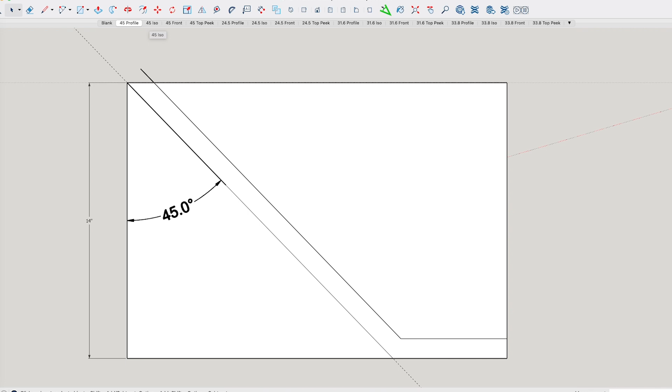All right, let's start with a frustum whose side angle is basically the same as that 45/45 crown molding spring angle, i.e. the blade tilt on this compound miter would be 30 degrees. Now notice at 28 by 28 and 14 inches tall, that's what this is modeled for here. At least in my opinion, this neither looks good nor is functional. It looks way too top heavy and like it would tip over. Not so good for a fire bowl.

So obviously we need something with a much steeper side angle that again still dictates a whole number blade tilt. How do we find that? Well, the good news is there are a number of more comprehensive compound angle calculators, and I've found a couple that are designed specifically with woodworking in mind.

This is perfect. Now, these calculators allow you to enter different values for different situations and compute all kinds of handy information. I've landed on this one at jansson.us, and all I can say is, man, I hope they never take this site down. This thing is awesome. Now, there's a number of different calculators on this site, and the one that I use most frequently that is a real bullseye for this type of object is this calculator for n-sided boxes.

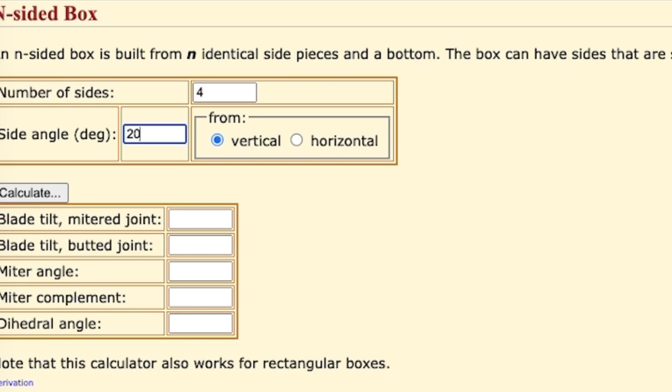Simply enter the number of sides for your object and a corresponding angle analogous to the spring angle in crown molding, click calculate, and bam, it'll spit out all the relevant associated angles for both the blade tilt and the miter angle, exactly what we need. So through a series of trial and error, we can explore a variety of side angles. For each of those, we can then note that side angle, model a frustum in SketchUp with that angle, and take a look and see whether or not it's aesthetically pleasing.

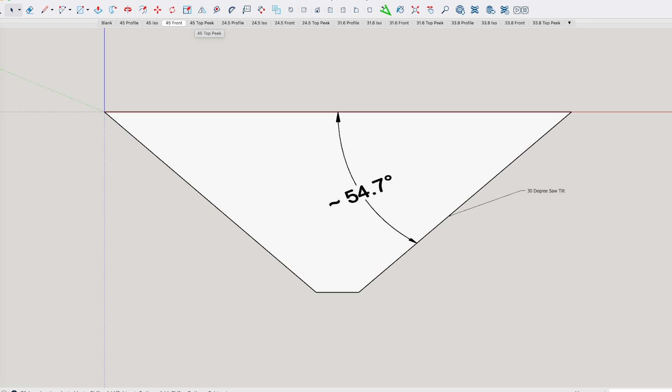If so, note those various corresponding angles, feed that into our fabrication downstream. This is exactly how I went about this. So let's take a look at a few of those. Okay, the first one was in fact the 45-degree side angle. And as I mentioned before, this one's automatically a no-go, but it's useful for a visual reference. I knew right away I needed something with a much steeper side angle, so I just kept cycling through and jumping around. And then the next one I landed on was this one, kind of the opposite extreme where it has a very steep side angle at 24.5 degrees.

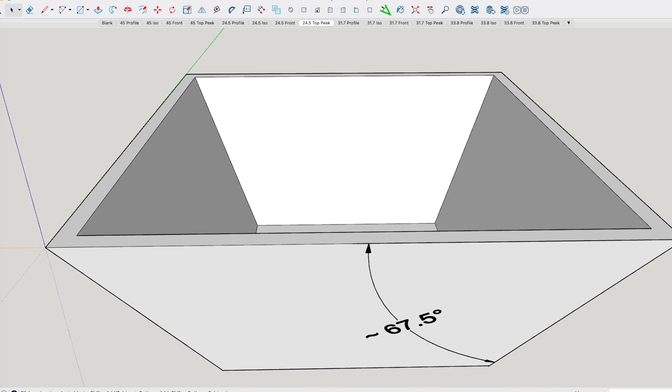Now from the calculator, this dictates a 40-degree blade tilt, very nice, along a 22.5-degree miter angle. Now this one's definitely a candidate, but in some situations it's almost too boxy. So jumping around a little bit more, I found another side angle of 31.7 that dictates a whole number blade tilt of 37 degrees. Now this one's really nice, and I fabbed a bunch of these, even a few jigs to help set the miter angle, pulled molds for a number of these at various dimensions. This one's a winner. However, the only downer that popped up down the road was after I onboarded my CNC.

I was really fired up to fabricate these on the CNC, only to realize that I couldn't find a 74-degree V-bit that would automatically mill that 37-degree angle. Now, one way I could address that is with fixturing, but that's kind of a pain in the butt where it's tilting the material to allow you to mill it with a tool or a bit that you do have, like a straight bit, and that tilt would result in milling that at the bevel angle that you want.

I wanted something super simple to set up, and after doing a little more research, I found that there are a couple options. One, there actually is a 72-degree V-bit that yields a 36-degree bevel. So I decided to head back to the calculator, do some trial and error, and sure enough, I found a side angle of 33.8 degrees that dictates a 36-degree saw tilt on a 29.1-degree miter.

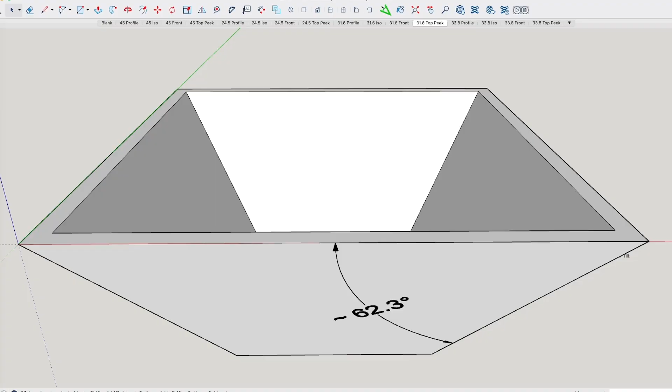Now, when you model this, it also starts to get a little bit steep for smaller bowls or taller bowls. But when we make them shorter or make the length and width bigger, i.e. a bigger bowl, the proportions look really nice. This is a winner. Now, the other option worth mentioning is custom tooling. I contacted a couple of manufacturers, and it's definitely possible to have custom tooling.

Both came in just under $500 for a custom 74-degree bit, compared to the $80 I spent on this 72-degree bit. Now, if I were producing these things at volume, and I needed that specific angle, then yes, the custom tooling would totally be worth it. But for what I'm doing here, this off-the-shelf bit that supports the 36-degree bevel and 33.8 side angle works just fine. So hopefully that was interesting and a helpful exploration into compound angles and some of the tooling considerations.

Lots of good tools there to help with objects that are way more complex than this. So check this site out and add it to your bookmarks if you find it helpful. With that background, let's dive into CAD.